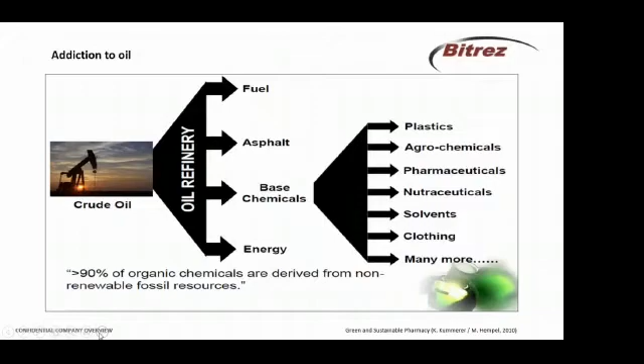So onto the subject matter of today's presentation and our material for innovation. As the slide suggests, we do have an addiction to oil. Many of the chemistries that people utilize within polymer matrices for composite materials have been in existence for up to 100 years, when we think back to the patent of phenolic resins by Dr. Leo Baekeland in 1907, and ultimately we have an addiction to oil.

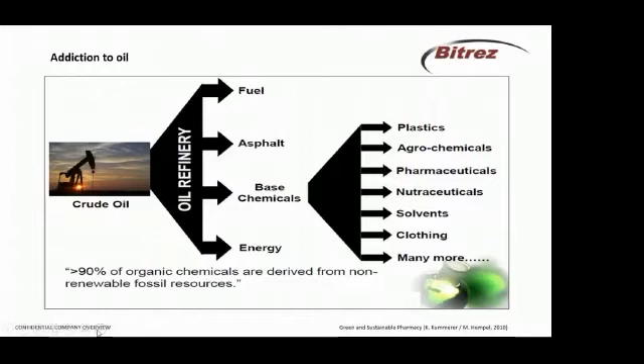And one of the things I will say is that some people may have seen these slides before, but again, they are very important and they will be used again as we promote the message that the greatest threat to our planet is the belief that someone else will save it. We need to move away from this requirement of using fossil-derived materials to more sustainable supply chains, and that is what our innovation FuraCure is all about.

So how has nature provided inspiration? Waste biomass, typically sent to landfill, is now being utilised across many areas within the chemical sector.

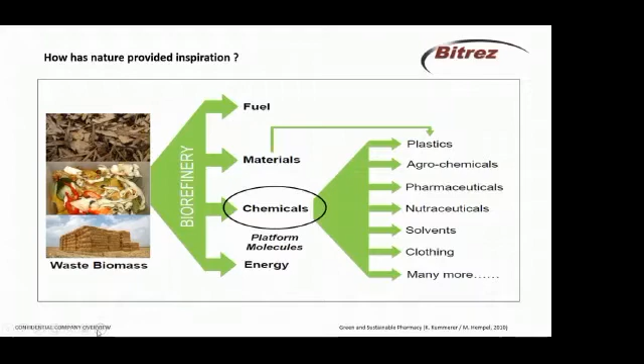Within the world of composites, we're seeing a greater development of a range of bio-based materials, from the use of hemp and flax and other waste materials as reinforcements, and the same will be said with regards to the resin matrix as well.

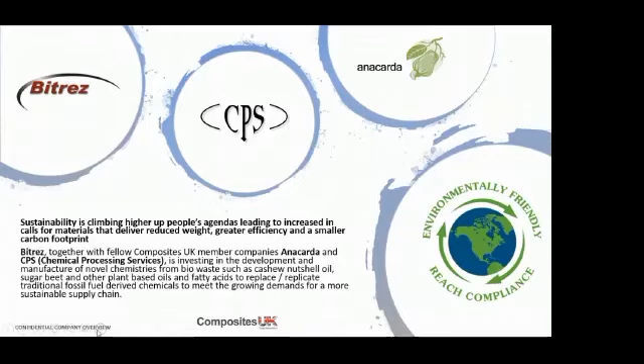In terms of the focus of our business, sustainability is climbing up the agenda and has led to an increased call for materials within the composite sector. We're a group of three companies, all members of Composites UK, focusing on novel chemistries utilising bio-based materials, but also ensuring that these materials are compliant with all the regulatory demands placed upon our business and upon our customers' business.

So what we're talking about here today, FURACURE, is pretty much a bio alternative to a phenolic resin. They are starting to replace conventional phenolic resins in a number of different applications. There's a range of well-publicised projects through some Composites UK members, but traditionally the supply chain of the PFA resin system has been from overseas competitors, and as Composites UK will advocate, we are trying to build a supply chain for the composite sector here in the UK.

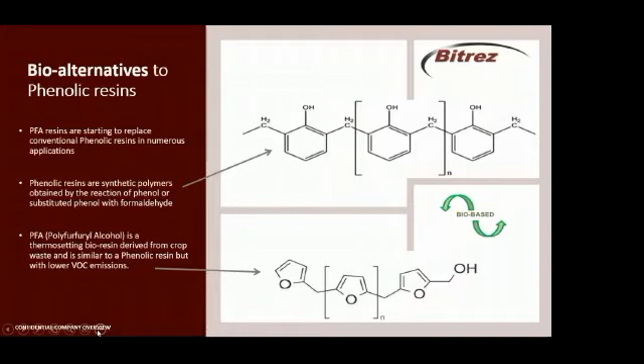The switch to developing a range of polyfurfuryl alcohol resins, which offer similar performance to phenolics, was the key objective of this innovation. Supported by our partner CPS, we've developed a range of polyfurfuryl alcohol resin systems, which, as the schematic shows, there's a number of ways in which you can derive the sugar element of the PFA resin.

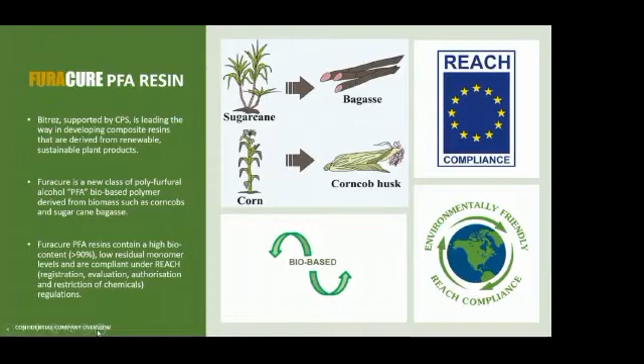In our instance, we use corns and corn cob husks, and what we have is a resin material with a very high bio-based content, which, as the previous slide suggests, cross-links in a very similar way, offering some of the benefits and performances of phenolic resins.

One of the things we're very keen on, as a group of companies, is looking not only at the bio-based content of these resins, but the whole principle of green chemistry. Back in the 90s, there was a document, a framework, developed to look not only at where the material comes from and what waste stream it comes from, but whether it's ethical and sustainable. This is something we as a business are working towards, to ensure it's not simply about utilising bio-based materials, but that they have a significant impact on reducing carbon footprint and increasing the benefits to the environment. One of the key credentials, of course, is the bio-based content.

What you can see here is a screen grab from a third-party independent testing laboratory, running a test, ASTM D6866-20, which is a way of determining the bio-based carbon content of a material compared to the fossil-derived carbon content. As you can see here, the PFA resins are 100% bio-based, which is certainly good in relation to our work around the 12 principles of green chemistry.

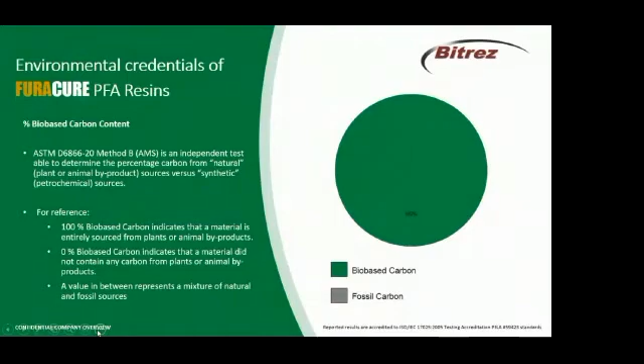Moving on to the benefits of the innovation, aside from the environmental credentials, the PFA resins offer the same flame retardant performance as a phenolic. These materials are polymeric, and so they are REACH compliant. They have an absence of substances of high concern, unlike traditional phenolics where we have phenol and formaldehyde, and formaldehyde is a very dangerous substance if inhaled. We are able to replicate the performance of phenolics without the formaldehyde. And whilst the furfuryl alcohol is again a toxic material, we're driving those contents down to less than the threshold of 0.1% free alcohol. Very good temperature and chemical resistance and outstanding acid resistance.

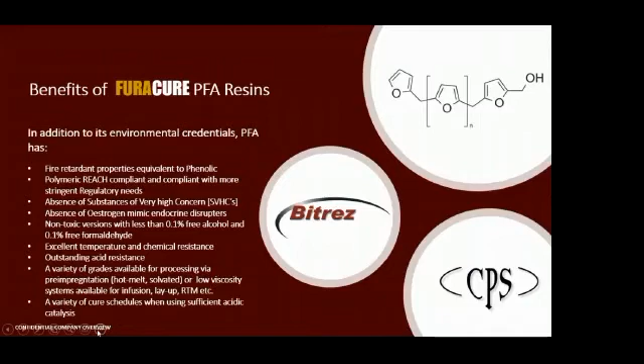Whilst we're targeting the two key areas of pre-preg manufacture, which is the hot melt and the solvated routes, we're also in the early stages of sampling and developing low viscosity systems for infusion and layup. It isn't without challenge - these materials are very pH sensitive, and the acid catalyst required to react them is a very delicate process indeed. But we see this as a fantastic opportunity for our business to improve our environmental footprint, and to support the UK composite sector with bio-based and more sustainable materials.

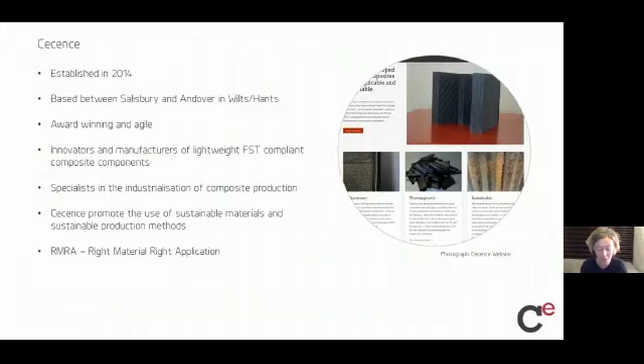Just a little bit about Cecence. We were founded just under 8 years ago on the Wiltshire-Hampshire border. We have a very innovative and agile approach to the manufacture and development of lightweight FST compliant components, and we are very proud of our largely locally based team and our sustainable manufacturing processes. We have an RMRA, right material, right application philosophy, which enables us to select the optimal fiber and resin combination for each application we're working on.

The award we've been nominated for this year is the result of a NATEP project where we developed an affordable - and that's probably one of the most important parts - option of an ultra-thin, lightweight, sustainable aerospace interior seat back. It's maybe useful to talk briefly about the landscape within which this innovation sits, to reinforce the need for the approach we've taken on this structural component and continue to take with the development of our other new products.

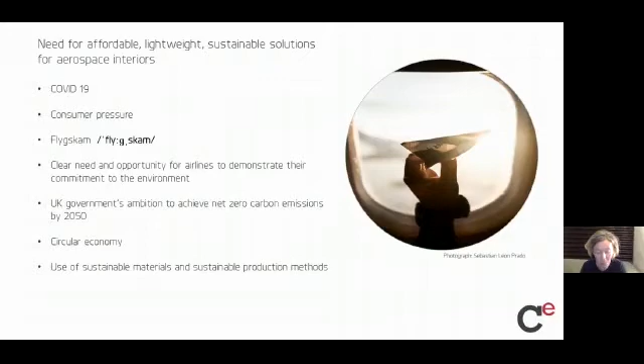COVID-19, as everyone is aware, continues to economically damage the travel sector. Consumer pressure is being put on airlines by passengers who are now better educated about climate change, and the Swedish have even created a new word, flygskam, to describe flight shaming. As Dominic was talking about earlier, there's a real need and opportunity to demonstrate our commitment to the environment. At the same time, the UK government's ambition to achieve net zero carbon emissions by 2050 has succeeded in reinvigorating the idea of a circular economy, and in the manufacturing sector there's been renewed interest in sustainable materials and production methods.

Consumer pressure will inevitably push for these new eco-friendly materials to be introduced, and the growth in recycled and renewable lifestyle products, a move away from fast fashion, and an increase in electric car ownership would suggest this to be the most likely direction of travel.

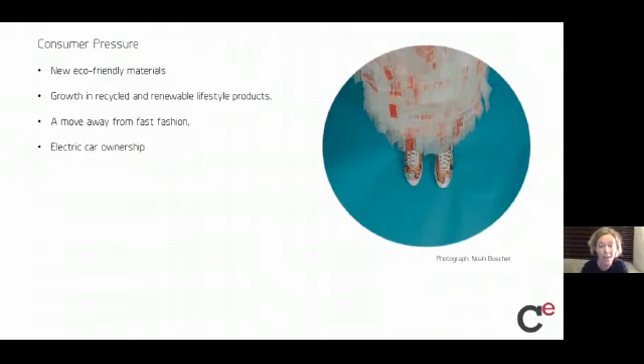To meet these environmental demands and the demands for future air travel, we'll need lighter recyclable components aligned with alternative fuel systems such as hydrogen and electric flight. There's been a great deal of development in greening the aerospace sector, but it's been predominantly focused to date on alternative biofuels and recycling in-flight consumables. Our composite manufacturing focus has been on lightweighting the cabin using carbon and glass fiber to save on fuel burn.

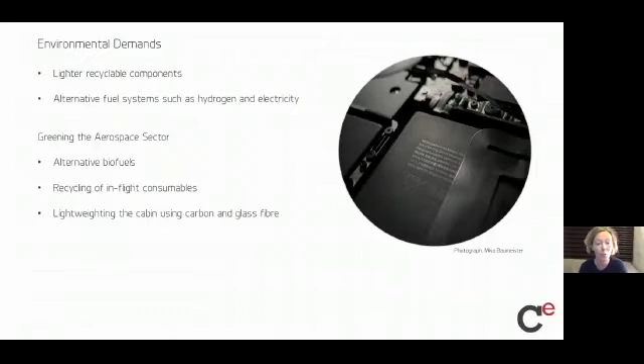Whilst structural and semi-structural aerospace lightweight carbon and glass fiber composite components have started to be embraced by the aerospace industry, they're still largely reliant on the use of phenolic resin systems. By integrating bioresin for future aerospace interior products, we can reduce the carbon footprint of the aircraft's fuel burn and encourage much needed investment in ideally a homegrown supply of sustainable resin systems.

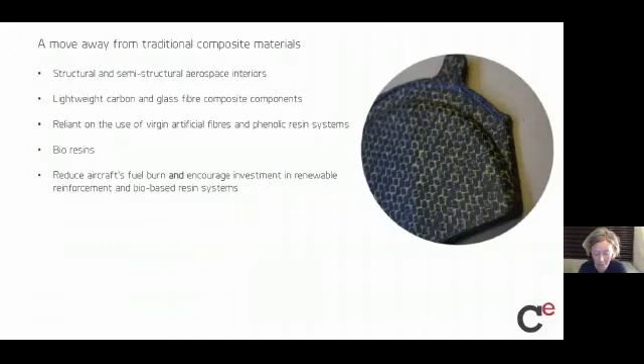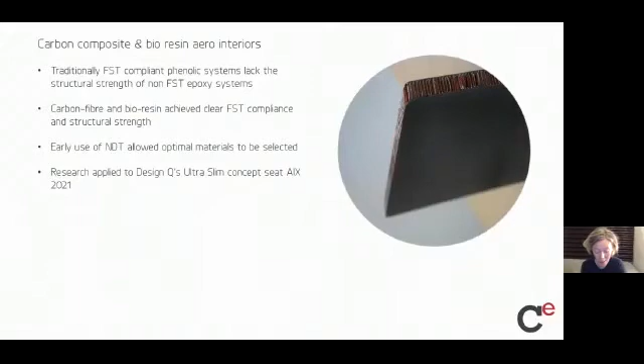Traditionally, phenolic systems have not had the structural strength of epoxy systems. For the development of the ultra-thin seat, Cecence integrated carbon fiber with a bioresin supplied by SHD and achieved both clear FST compliance and strength. Early use of non-destructive testing through partnering with Wavelength NDT, as an integral part of the development process, allowed optimal materials to be selected from a really early stage. The basis of this research, combined with Cecence's composite material, structural engineering and processing know-how, is very much at the heart of this innovation.

Cecence were awarded support through NATEP in the form of 50% of the development costs for a project entitled Low Cost FST Compliant Composite Components. ATI have recently increased NATEP funding for SMEs to 70% to stimulate further innovation during the pandemic and economic crisis.

The 18-month project was completed in early 2020 and initially had set out to develop a relatively small structural subcomponent of an existing seat design. As the project developed, and through our partnership with SHD Composite Materials and Wavelength NDT, we could see the potential to not simply focus on the originally selected smaller subcomponent, but to look at how we might take the early analysis and study and apply it to a whole seat back.

This in turn provided the encouragement for Design Q to work closely with Cecence on the development of an entirely new, larger structure, excited by the discoveries that had been made during the project and a greater understanding of how carbon fiber and bioresins could provide a more radical weight-saving and, critically, sustainable design.

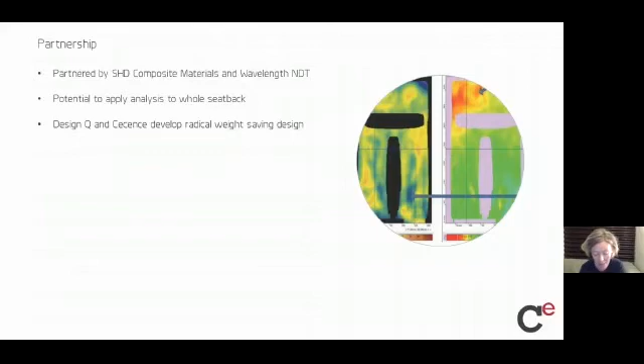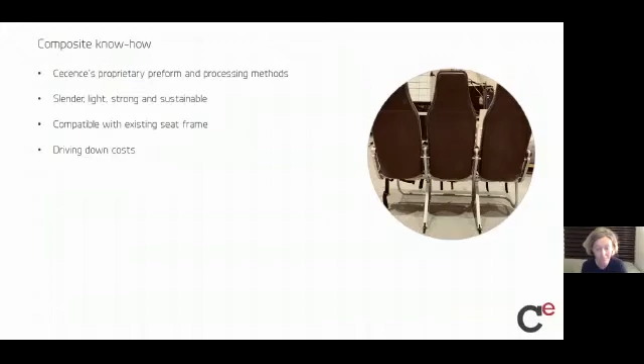Cecence's practical approach and understanding of how to industrialize composite production through its proprietary preform and processing methods produced a seatback that was slender, incredibly light, strong and sustainable. The component is designed to be compatible with an existing seat frame structure, which helps to drive down costs for the airline in terms of upgrades to current seating.

So the innovation will enable more legroom and fit with the needs of today's commercial airline passenger. The 7-kilogram weight of the design saves at least 500 kilograms per flight on an A320. The seatback's bioresin carbon composite offers an opportunity for the airline to demonstrate its eco-credentials to today's eco-savvy customer and to support a circular economy. The resulting product is a great example of driving innovation through a collaborative approach.

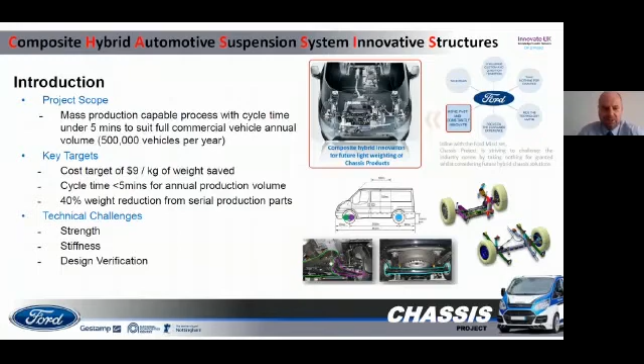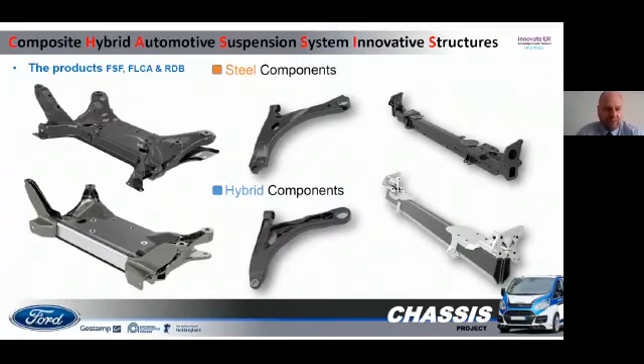So that really does simplify the part manufacture itself. It takes out a lot of the expensive welding operations that we have that can have inherent quality issues as well. So this actually helps quite a lot for our plants and our suppliers. Next slide, please.

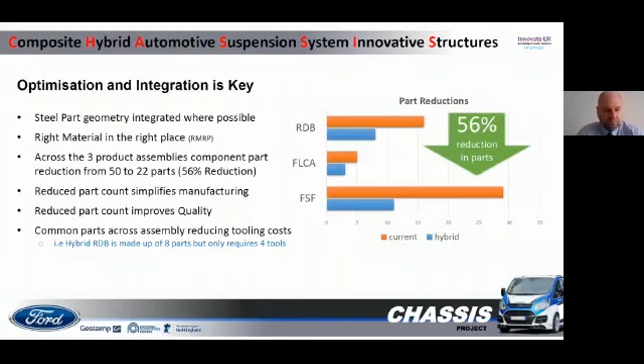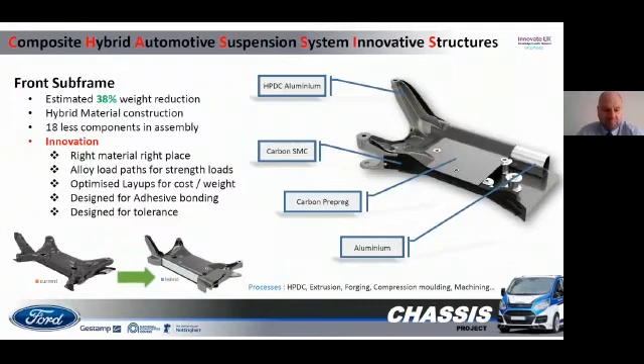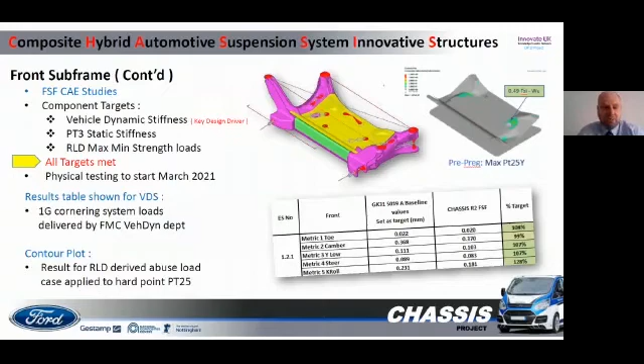The front subframe itself, our CAE studies, this is one slide to show what is basically 3 years of work, so apologies, it's down to one slide. All of these stiffnesses that are required for this part, bearing in mind that this holds the lower control arms, this is where the suspension is effectively mounted to the body, were all taken into account. They had to meet all of the design practices of the steel part, so we didn't leave anything behind. And this part, so far in CAE, has met all of our requirements. Next slide, please, Claire.

That's overmolded by the inner core, and then that whole assembly is overmolded again with a PA12 nylon long carbon fiber, hence it's black on the outside. Again, that component reduced its subcomponent count by 2 parts. It's going to save around 29% of the weight of the steel part. After this, we insert the bushes as we would normally do on a post process, as we would do with the steel part as well. Next slide, please, Claire.

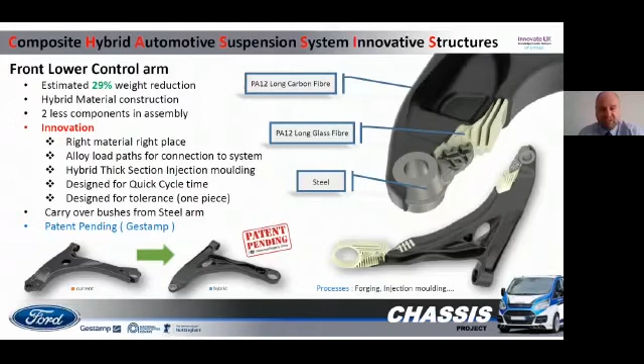Again, one slide to show you 3 years of work, but clearly the lower control arm is very important. It holds the wheel on, so it's very important that we maintain the static stiffness, the buckling, the strength loads, and its durability. All of our targets were met on this particular part. It took quite a lot of design development to make sure that we were in the box with this part. The lower control arm, as I said, holding the wheel on, is a very sensitive part with regard to manufacture. But this part far exceeds the design of even the steel part, so we're very happy with this one. Next slide, please, Claire.

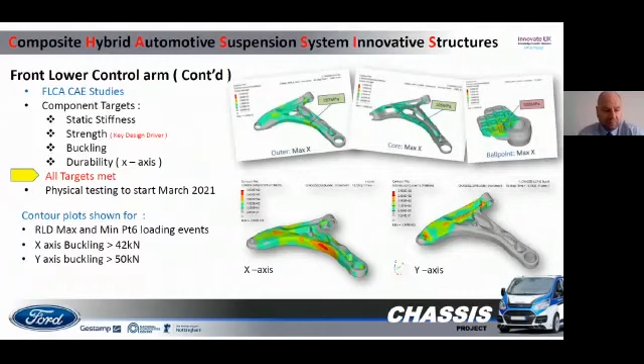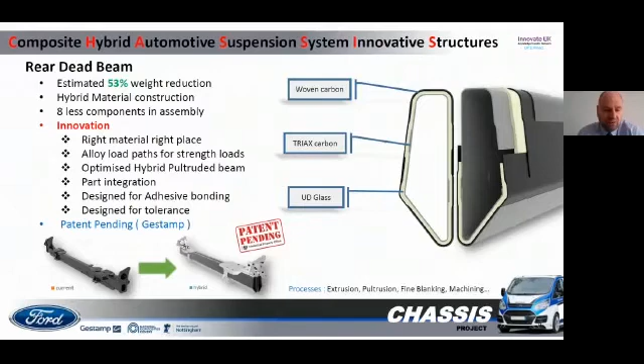And again, our CAE predicts that we're not going to have any issues with this. We actually have extruded aluminium.

I've lost your screen, Claire. Hopefully it will come back. Oh, there we go. Thank you.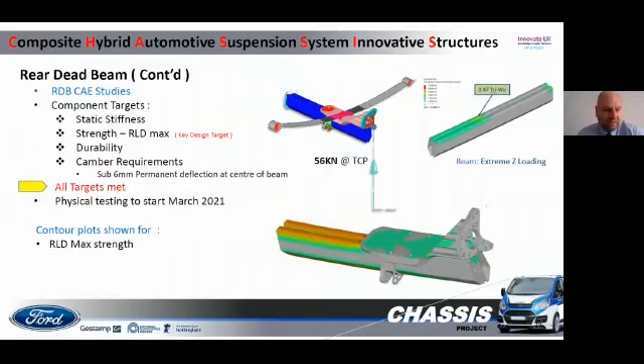This has extruded aluminium ends that hold the wheel bearing carrier, the spring seats, and the jounce bumper reaction plates, and the whole thing is assembled with adhesive bonding to meet the vehicle integrity. Next slide, please.

So we have a pretty good LCA analysis on this. We get payback in CO2 from cradle to grave on this within 3.35 years for the front subframe, 1.3 years for the control arm, and just over half a year for the rear dead beam. Now, the differences in those are due to the manufacturing processes of the materials that we have in there.

So the front subframe, although it saves quite a lot of weight, has UD pre-preg in there, which is a very CO2 intensive process to manufacture that part in the first place. Hence, that one's quite CO2 intensive, and the payback has been 3.35 years.

On the rear dead beam, of course, we still have triax carbon, and we have woven fabric that goes over the top, which again is still quite CO2 intensive to actually manufacture those parts. But because of the amount of weight we save, we get payback in just over half a year.

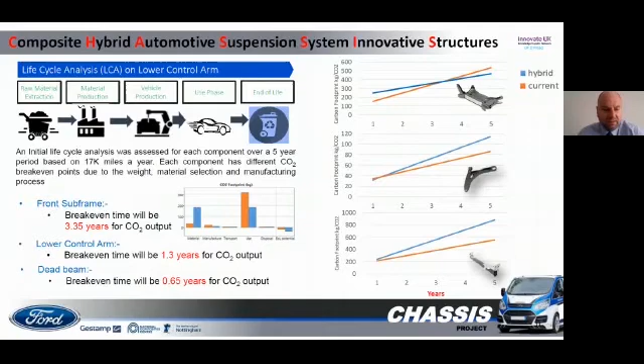Thank you very much. So in summary, you'll be pleased to know I've nearly finished. Our steel parts are on the left-hand side. All three of those together weigh just under 70 kilos, and they've been developed over many years, and they're optimized for the vehicle, so there's not any weight to take out of those.

But when we moved to the composite hybrid solution, we actually reduced the weight of those parts to 38.7 kilograms. So that's a 44% weight saving compared to the 40% target that we had. So we saved just over 30 kilos. Next slide, please, Claire.

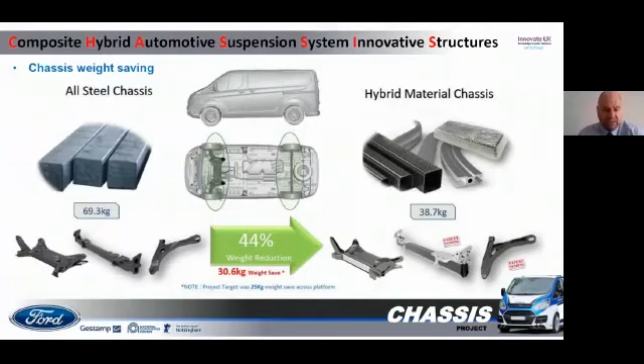So as you can see, we met our cycle time for the volume production on all three parts. We've achieved our 40% weight saving. We've got 56% reduction in the assemblies. Our CAE process has predicted that we will have a really, really good result at the end of this.

And manufacturing will be done on exactly the same test rigs with our supplier Gestamp, who make the steel parts. So they will be tested back to back on the production rigs. We've achieved all of the CAE targets, and our costs are fully in line with our $9 per kilo target.

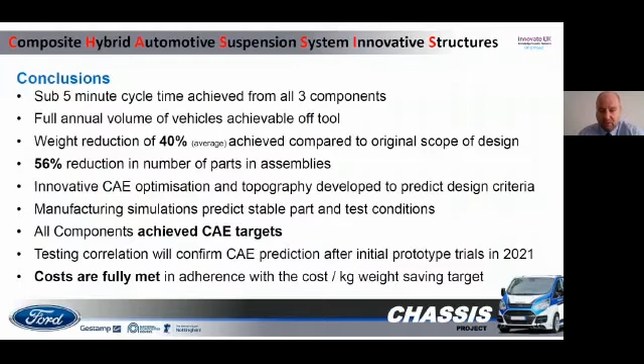We'll start the manufacturing and the trials of this in early 2021, and we expect to have a really good result when these parts go on a vehicle.

And what I'll do is give a quick intro to the company and the specific materials we focus on, mainly because not everybody's aware of them. They're a little bit unique, and then quickly move on to the project in partnership with Safran. So Alvant is classed as an advanced materials company, and we focus on aluminium composites. And our mission is to be a catalyst for material evolution, or be part of it, and increase the capability of the world's most demanding products through the application of advanced materials and manufacturing techniques.

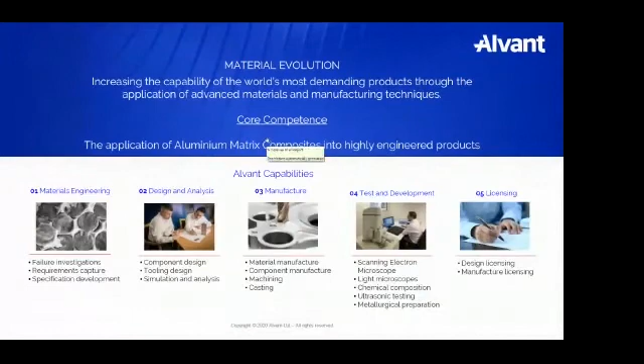So our core competence is the application, design, development and manufacturing of these AMC materials into highly engineered products. And as you can probably imagine, we have a range of capabilities to allow us to do that, from materials engineering through to the other end, where we want to get these materials into market. So it can be a combination of manufacturing and licensing.

So, what is an AMC, an aluminium matrix composite? Well, they're similar to carbon composites. They're not a single material. They're a family of materials, and the properties can be tailored through the matrix, the aluminium that we use, and also the reinforcement selection. But in essence, these materials are lightweight and can provide the strength of steel with the weight of aluminium. That's the whole concept of them. So essentially, we bring together aluminium with a high performance ceramic material, which can vary in format and type, and out of the other end we create a metal composite, an aluminium matrix composite.

And the benefits of these materials, as I alluded to, they can give you the strength of steel or titanium, but at 1/3 of the weight. If you're comparing it to aerospace aluminium, say a 7000 series, we've got tests that we've run with customers where we've had 4 times the fatigue strength. One particular customer ran a back-to-back test comparing our material against a 7000 series aluminium on their component, and where their current material failed at around 50,000 cycles, they actually stopped the test at 10 million cycles with our material, because they needed to free up the rig to do some other work, and I think we proved the point.

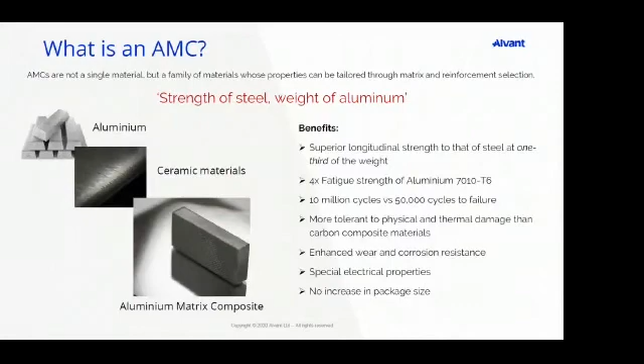So they're very fatigue and damage tolerant, and depending on the variety of the material, they can enhance the wear and corrosion resistance, and you can also tailor the electrical and thermal properties. So they're an exciting prospect and material with, as you can imagine, lots of applications across lots of markets.

So at Alvant, we have a patented process for how we actually manufacture the materials, and that provides us with 4 material families, and we've given them brand names here. So our Alzal material is a high strength lightweight material, and that's a continuous fibre. We also have a very unique sandwich material, which we call Corzal. We have a syntactic foam, which is called Airzal, which is about 1.5 grams per centimetre cubed.

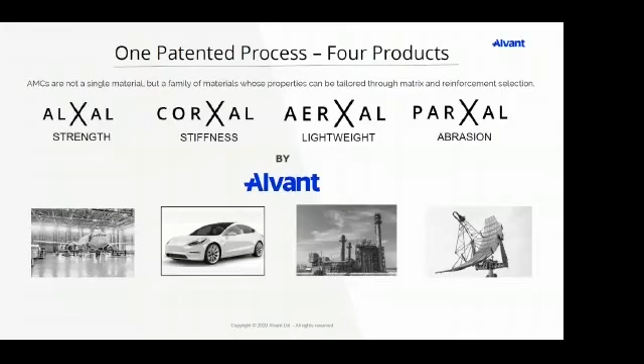Syntactic foam essentially is a metal foam with glass microspheres. And finally, Parxal, which is perhaps a variety of AMC which people are more familiar with if you are aware of them, which is a particle reinforced aluminium, and that's typically silicon carbide particles, and it gives you very good wear resistance, very hard wearing, so abrasion resistant.

So overall, the overarching value proposition and why we are working with Safran on a particular project is the whole concept of being able to enhance the capability of a product whilst respecting the sustainability targets. And that's, as Samantha and the other guys have alluded to, to combat the growing challenges around trying to achieve net zero by 2050, legislative demands, and also to place the UK at the forefront of technical innovation.

And also interestingly with the continuous fibre AMC or Alvant material, it has potential for recyclability. We can separate out the aluminium from the fibre, but ultimately, because of the lightweight nature, it can help reduce your fuel consumption and carbon emissions. So overall, we have this overarching value proposition of sustainability with enhanced capabilities.

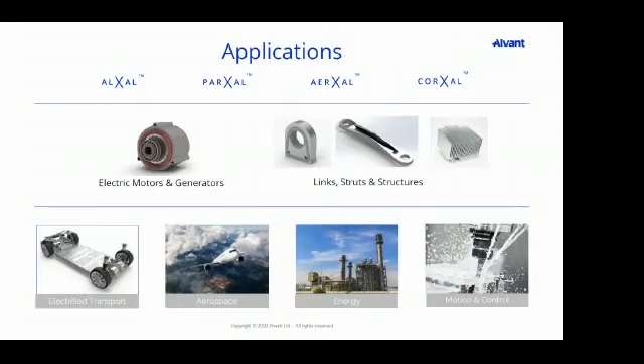So as you'd imagine, lots of applications and lots of markets. But currently, we're focused on electric machines and links, struts, and structures. And today, I'm going to just dip into the project we've been working on with Safran, which is more on the links, struts, and structures side of things. And at the bottom there, no surprises, we're into electrified transport, aerospace, power generation, and motion control type of products.

So our nomination for this award is based off the work we've been doing with Safran Landing Systems on a large Innovate UK backed programme called Large Landing Gear of the Future, and it's a 2-year, £28 million project. And our contribution to the project is to look at a brake rod, connecting rod, which is in the landing gear. So hopefully in the image on the right, you can see underneath the wheels there, you have these connecting rods or links or struts, which link the front wheels to the back wheels, the braking system side of things. And our target is to try and reduce as much weight and replace titanium.

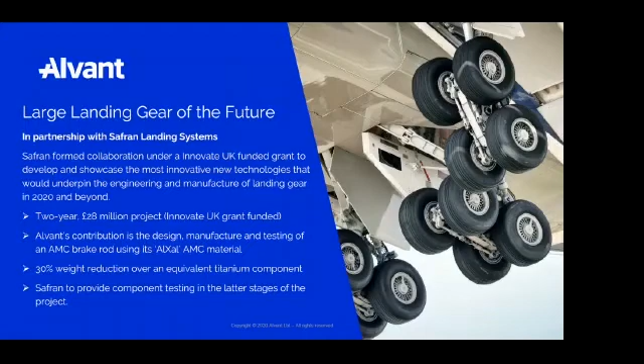So typically, if we're talking about aerospace, we are typically tasked with displacing titanium components for various reasons. And so our goal is to achieve a significant weight saving whilst also achieving the same design allowables as titanium. And Safran are obviously guiding us and will also be responsible for testing the component in the latter stages of the project.

So exactly like Samantha said, it's all about reducing weight, fuel burn and noise, improving the reliability and obviously lowering operating costs for commercial airlines. And typically, because of the safety requirements, particularly landing gear systems are over-engineered, and that means that, wet finger in the air, landing gear can be responsible for about 3% of the aircraft weight.

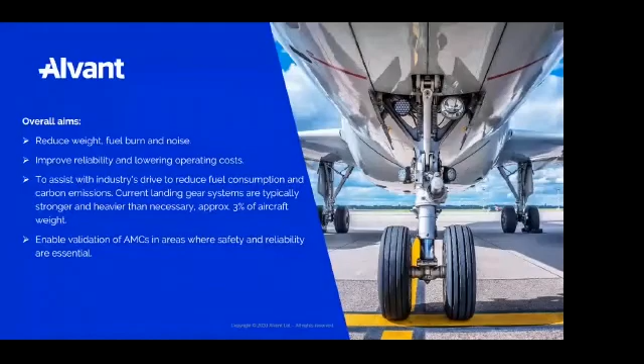And of course, once you've taken off, the landing gear is a bit of a parasitic loss, really. You're just carrying this massive weight around, which isn't doing too much unless you're landing or you're on the ground. So it's a good opportunity to look at how to take some significant weight out of those systems.

So our solution, and what our nomination is about, is the work that we've done to date. And similar to Alan, we've boiled it down to one slide, but a lot of effort and work over more than a year has gone into this. And so from a timing point of view, we're currently at quarter 17 of a 23-quarter project. And our design, simulation and validation work is indicating that we're on target to achieve a 31% weight saving on that particular component.

And we've done that with some innovative, unique way that we design the fibre architecture, which you can't really see. You know, we're a little bit sensitive to some of the IP around this, but within that component, there's some unique fibre architecture and how we actually create the preforms. In this particular example, we've used a robotic fibre placement technique, and then we use our in-house proprietary process, which we call advanced liquid pressure forming, to create a near net final part.

So yeah, we've completed a series of element level tests to date to demonstrate the capabilities of the manufacturing technique and validated the predictions from the FEA modelling. And we're scheduled to test in 2021.

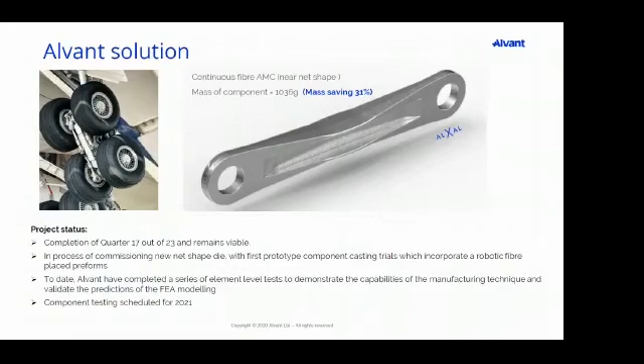You got 1 minute left, Richard. That's good, because that's my last slide. Excellent timing. Yeah, exactly.

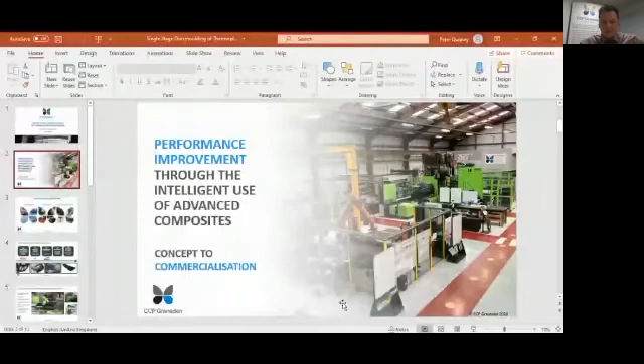What is our innovation? Our innovation is single-stage overmolding. It's been a long route. This is not something that's happened in the last 6 months. It's culminating about 5 years of work, and it's culminated into a carbon fibre PEEK access panel, a representative access panel focused on aircraft structures. But you can take that demonstrator and apply that technology in multiple places.

I'm not going to get too much into the technical on single-stage overmolding. I could be here for about an hour talking on that. But really just to give an overview of what we've been up to. So, what do we do at CCP Gransden? Well, we're a manufacturer of advanced composites. Like some of the themes before, we believe in the right material in the right place, having the right process for the application. So we don't just do thermoplastic process here. We have a range of processes that we can work with, and that means we can deliver the right process optimized for our customers' needs.

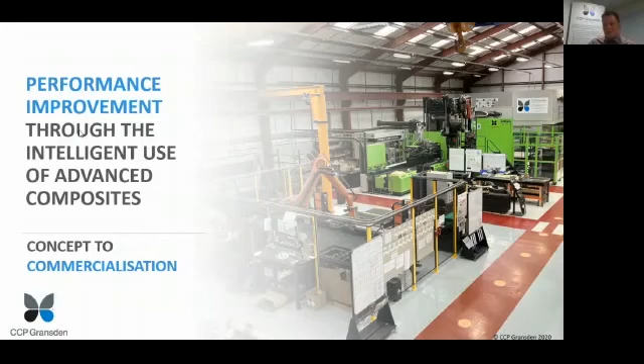Our end goal is production, but what we recognize is we do have to get involved at the very start of programs so we can drive the DFM and drive efficiency into the component. We are active across multiple sectors, so aerospace, automotive, security and defence. And whilst they're quite different sectors to be involved in, there's actually a lot of good synergies between them. It's been very useful for the development of the single-stage overmolding process.

One of the key areas is around qualification. So aircraft structures, we know that is a hard challenge. We know we need material qualifications, process qualifications. Airbus, Boeing need to be involved in that, and that's a long process to get to that point. However, aircraft interiors qualify products differently. So the qualification process is significantly shorter, and defence in particular can be as short as a 1 or 2 month qualification program. So we can use the different sectors to our benefit and the diversity of the qualification approaches to really advance this technology. It also gives us views of a lot of different applications of this manufacturing process.

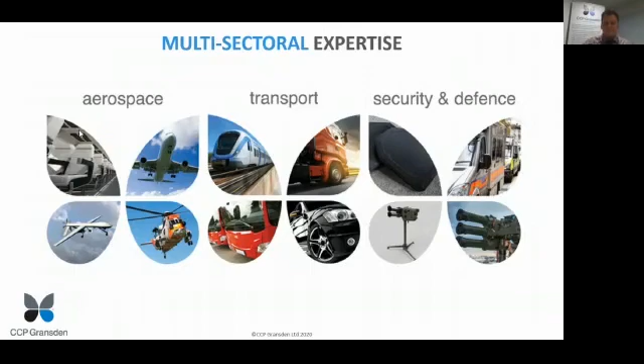So taking you on a journey from 2015, we as a company have been around for 125 years, believe it or not, but in 2015 we moved away from what we call GFRP large industrial sector assemblies and components to focus on aerospace, automotive and defence.

In 2015 we took on the NATEP project, and you see the demonstrator lines in the bottom left. We were able to realise thermoforming of pre-consolidated thermoplastic laminates - taking a Toray or Teijin laminate and press forming that. That is a flying technology today.

In 2017, we took on a large investment program, part funded by Invest NI, and we looked at multiple different technologies. One of those was single stage overmoulding. In 2017, we were able to successfully manufacture PPS injection molding compound, injection molded in a single stage onto a PPS laminate. That was a good success.

A lot of people have seen this component, because the next stage was to take that to market, get it in front of the OEMs. So 2018, 19, even to today, is about getting this technology in front of customers. In 2018, not solely focused on single stage overmoulding, we entered into 2 large programs, one with Jaguar Land Rover and another with Bombardier, focusing on these high rate technologies.

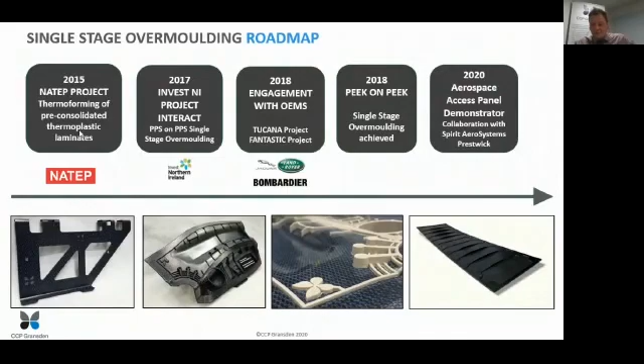In 2020, we were able to move forward and manufacture an aerospace representative component, working with the aerospace primes to develop that and make sure it's customer focused. So what's the cell that we do this on?

It is a high rate advanced composite manufacturing cell. It's here, in our factory just outside Belfast. It's a large press, an infrared oven, robot - that allows us to do the thermoforming operation, but integrated into that is an injection molding unit, or an HPRTM unit. It all comes together in a single cell, so we can combine these processes as we need to.

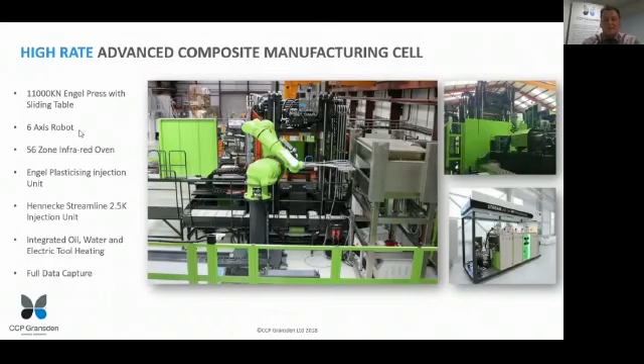So for thermoforming, we're taking a pre-consolidated laminate, heating it in the infrared oven up to melting point, 400 degrees Celsius. We do that in an optimized oven, so we achieve that in about 1 or 2 minutes, depending on the thickness of the laminate. We then transfer that rapidly into the press whilst it's still molten, and press form the component to shape. So that's thermoforming, a process in its own right.

What we then do is single stage overmoulding. Whilst it's in the press, we open the injection molding unit and inject a shot of injection molding grade polymer, similar to standard injection molding - carbon filled, glass filled, 30-40% polymer. We inject that in a single process. The benefit is the laminate is in the molten state, and the polymer coming in is also molten, which creates a melt-melt interface. That's what gives us what we believe is a performance improvement over a 2-stage overmoulding, where you have a warm, solid laminate and molten polymer.

So we look at our 2017 demonstrator - what benefits does this technology have? We tried to encompass as many things as we could: localized targeted stiffening, the ribs, structural optimization, targeting load cases. In aerospace, when we design a component, there are multiple load cases, and if the load case defining the thickness of the laminate is bearing, the whole laminate has to suffer that thickness. With single stage overmoulding, we can target the area with those bearing loads and reinforce it with overmoulding compound.